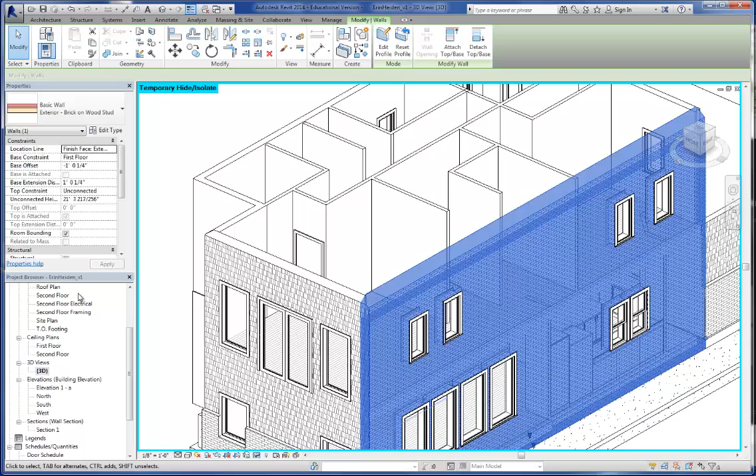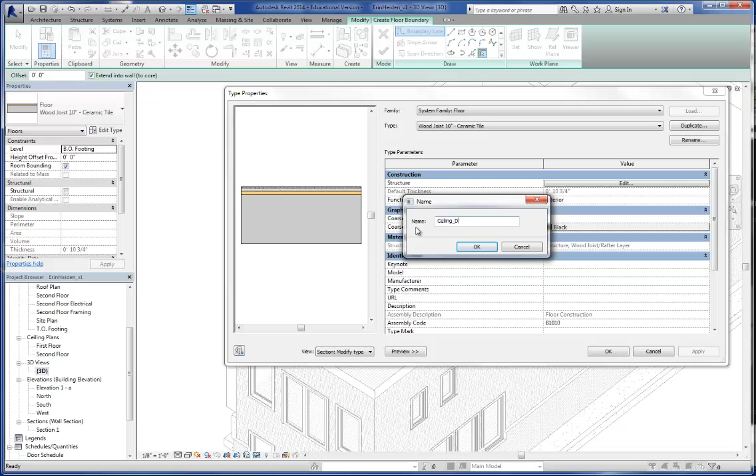There we go. Okay, now what we're going to want to do is create a new floor plate. Now that sounds kind of counterintuitive, but you'll see where we're going with this pretty quickly here. So we go to floor, and I'm just going to pick one of these guys, this 10-inch joist. I'm assuming somebody's done the structures on this, but then we're going to duplicate, and I'm just going to call this ceiling DH. I'm going to be developing this here, okay?

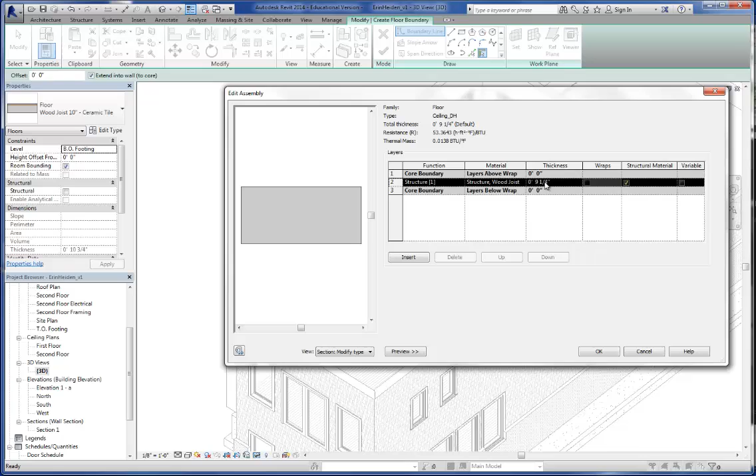So we'll go ahead under structure, and we can go ahead and just delete away these layers that we don't need. Those will be exposed up in the ceiling. We're not going to have plywood sheathing because it's not going to be occupiable — people will be able to hop from joist to joist if they're up there. So we have only the joist itself, and you can see here the actual dimensions relative to the nominal, right? So we'll go ahead and hit OK. And hit OK, so we have our 10-inch, so to speak, joist.

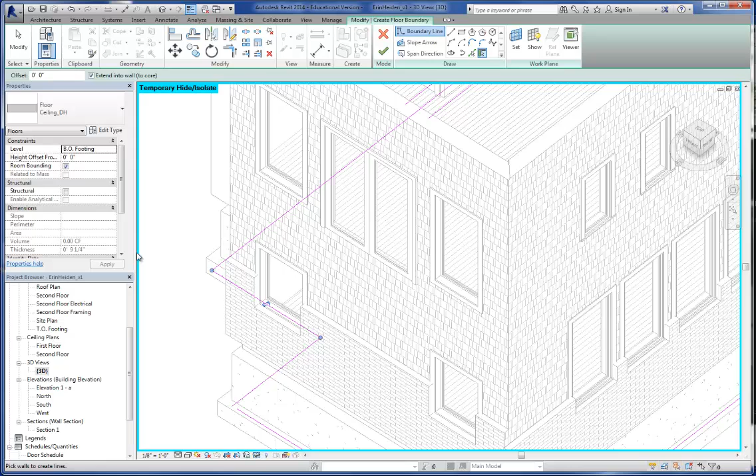Now we are in floor plan sketch mode, so we can select by wall, going in a clockwise direction, and I'll note that this didn't close because we have two different wall types. So I'll go ahead and just align that, and align this. I'm going to go ahead and set a different span direction here, because this is going to be the direction that we would actually have the joist moving.

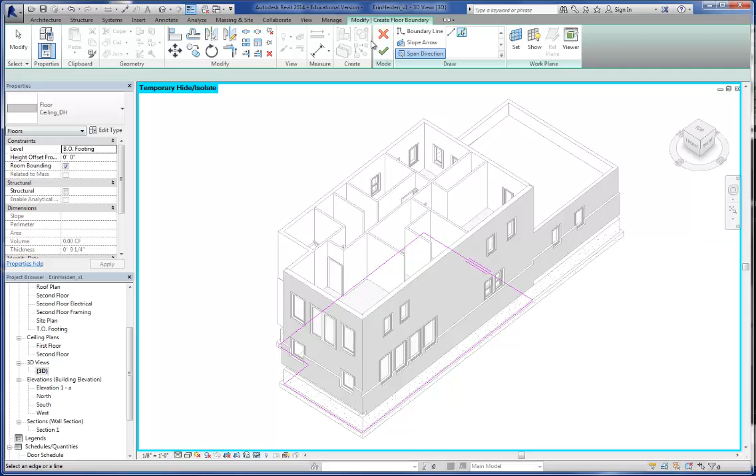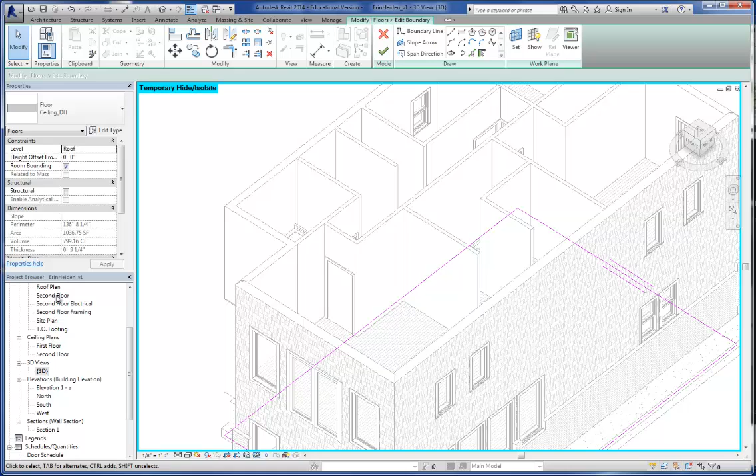Okay, so hit OK, and it created that, and we didn't put it on the right floor, so we're going to go put it in the roof floor. Okay, and you can see that that's now been created here. Alright, so if we go to edit the boundary now, let's go into our second floor plan, and let's just get these things aligned here.

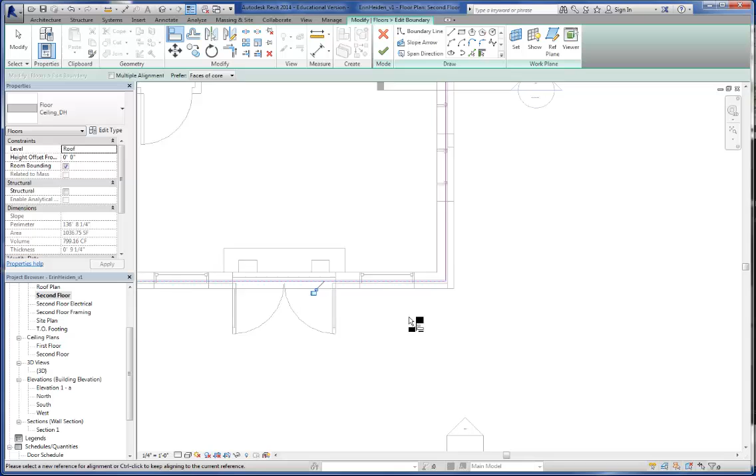So we're going to be faces of the core, roll over, get that, and I'm just going to do these two faces because that's continuing along with what I've done already. Okay, so hit OK. It's going to ask us to join this stuff, and we can hit yes.

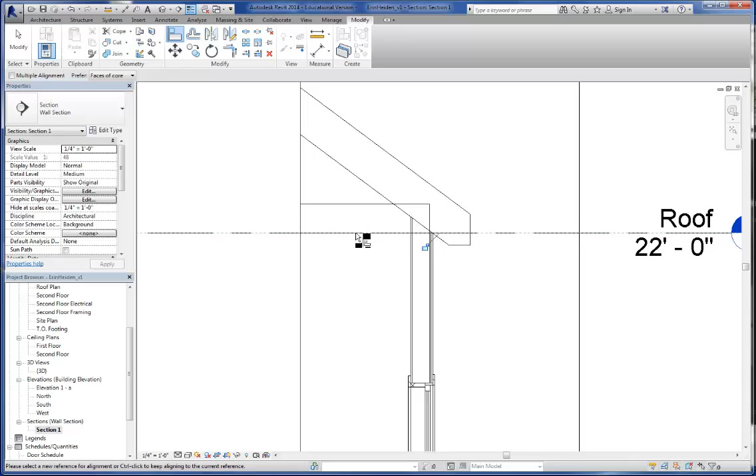In real life, what you do is you'd have some kind of structure coming up in here, and I'm not going to get into this to go crazy, but we'll just go through, and this is essentially how you guys can start to set this up.

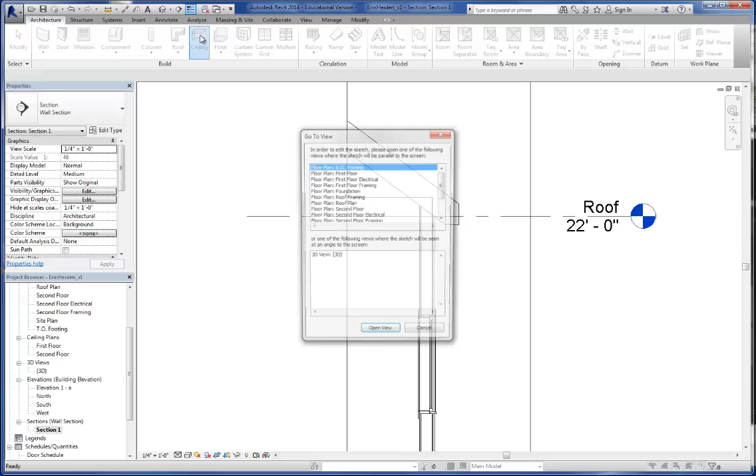Okay, so if we go through there, and now we're going to go into the architecture in the ceiling here. We're going to place the ceiling, and I'm just going to go into 3D view to do this. So now we have that on there. We can literally attach to the plan, attaching to the bottom of that.

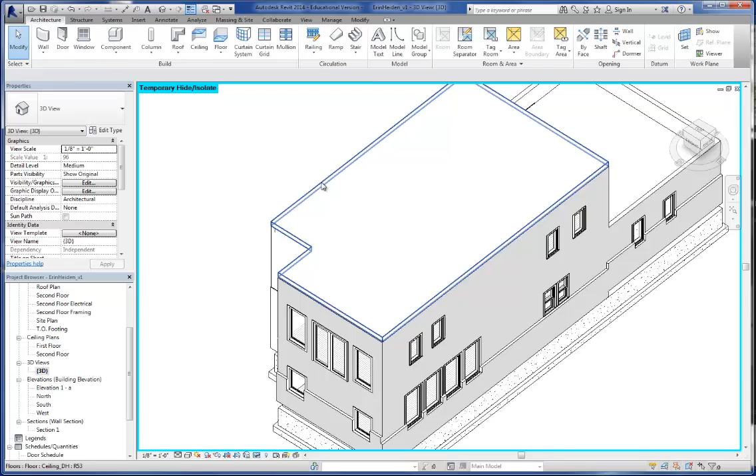So we have ceiling, and we'll set this up on the second floor. You can see that roll over there, and then it's going to automatically try and tag over to that. So I'm going to go ahead and hide these elements away so that I can see where I have and have not placed ceilings in here.

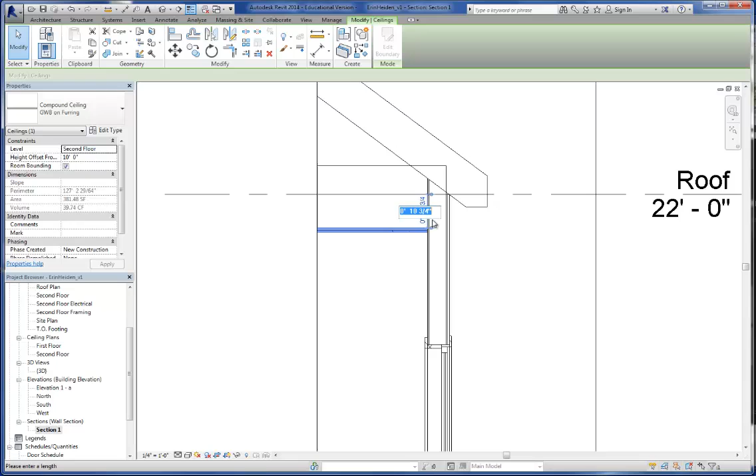So right now we have a 10-foot offset, so let's make sure our offset's right, because we won't really be able to easily see here. And it looks like we'll have some distance between there and there, so let's set that to 0.

Alright, and that gives us an offset of 10 foot, 10 3/4, so we'll copy that. Alright, now if we go back into our 3D view, you can see that that's sitting there, everything's alright, and that will actually be mounted into the studs there.

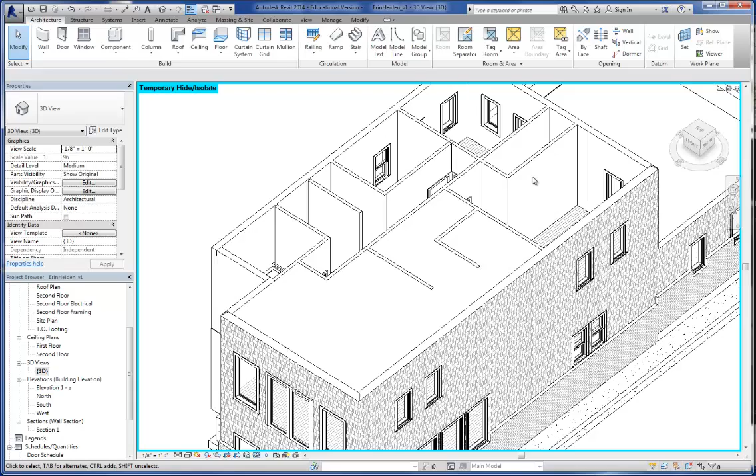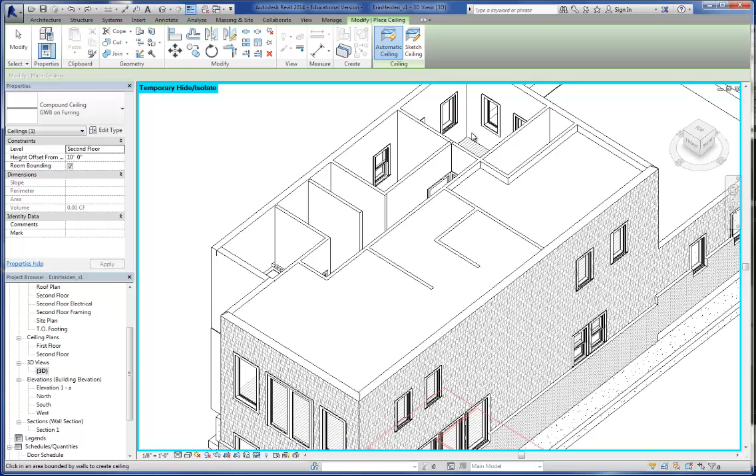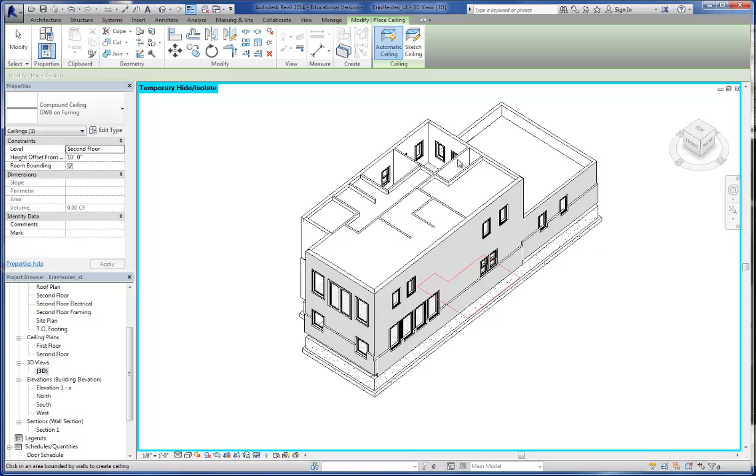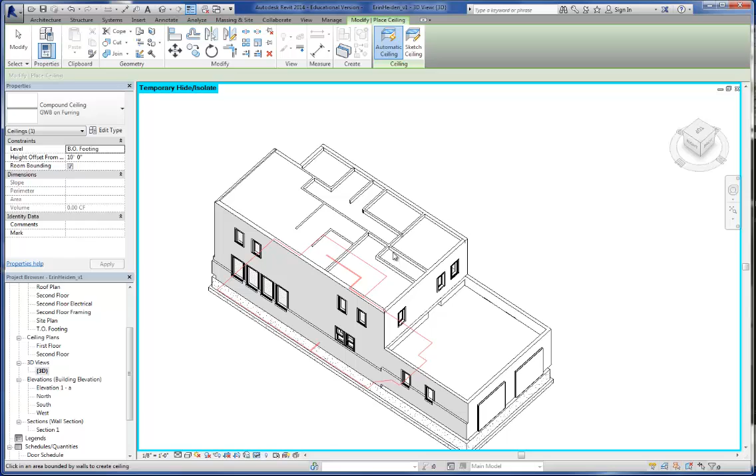And so now we can place more other ceilings. And so we'll go ahead and do this. Alright, so now we're almost there, one more. Okay, I don't think I created any extras, but we'll see.

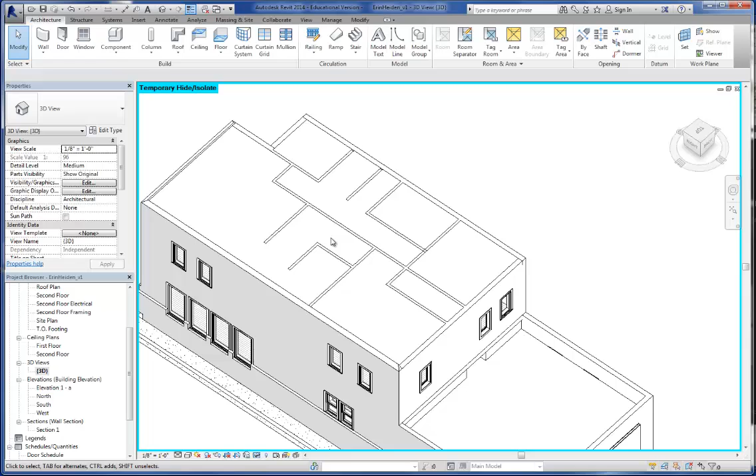So if we then go and select these guys, because they're all the same type, we can come in here and just paste in that new value. Alright, now all those guys will actually come up and meet the floor, and we'll have a ceiling with this hung on gypboard in our section here. So we'll look at this, and you can see now this is all set.

Alright, and so that's going to be the placing of the ceilings in this, and you can see our section continues to develop here. And at this point, we're just going to go ahead and take a quick building section through here. So I'll just show you guys how to do that.

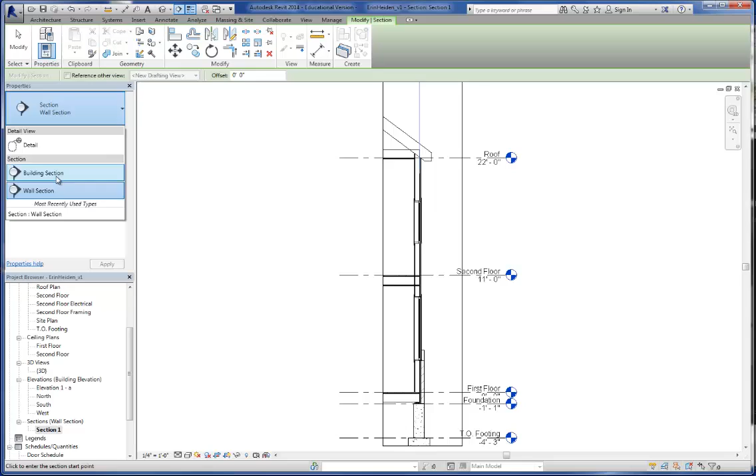Building section. Okay, cut through building, and we'll go into our floor plan here. We can just, okay, so we'll just take this guy and cut him like that. We'll go ahead and just look into the kitchen here.

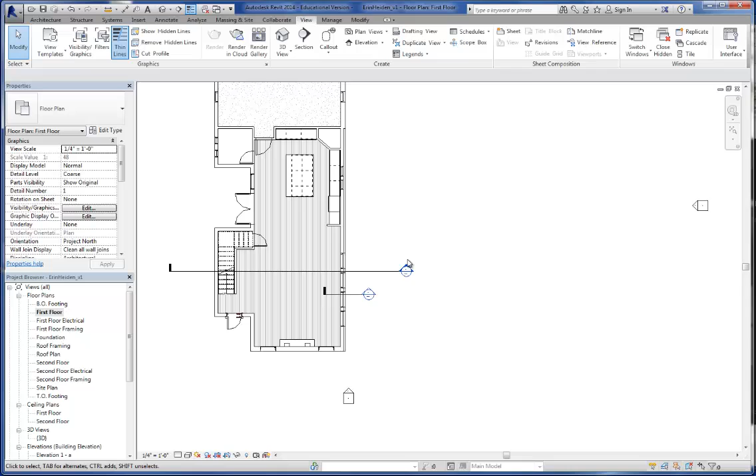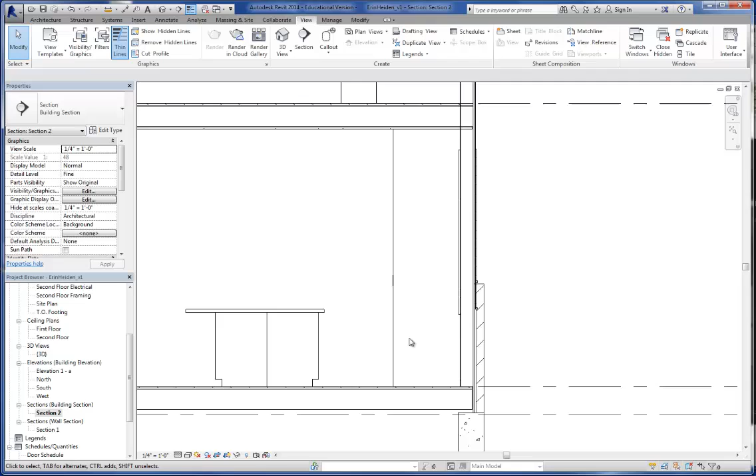Building section, section 2. Start to see how this thing's starting to form up. And we'll go ahead and set this to fine. You can see I probably need to place this. Looks like this has now become unjoined.

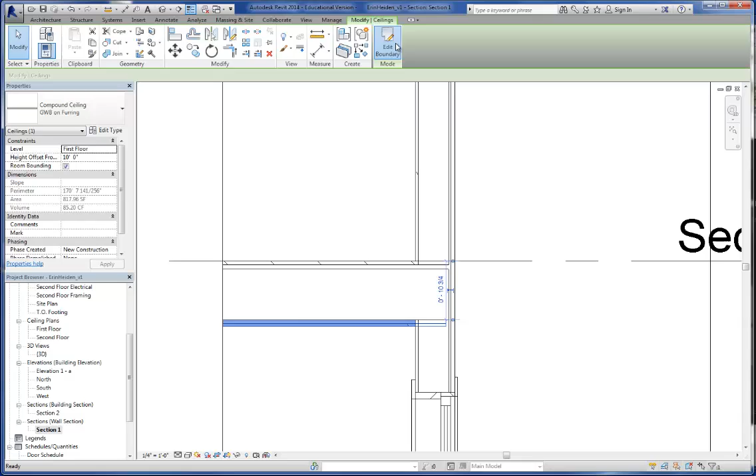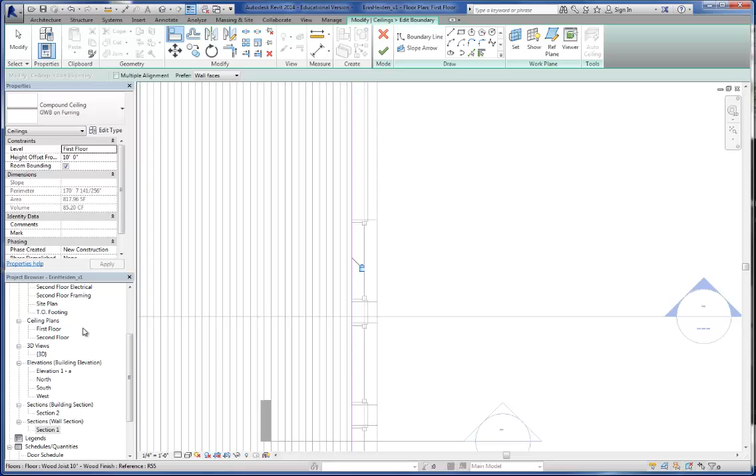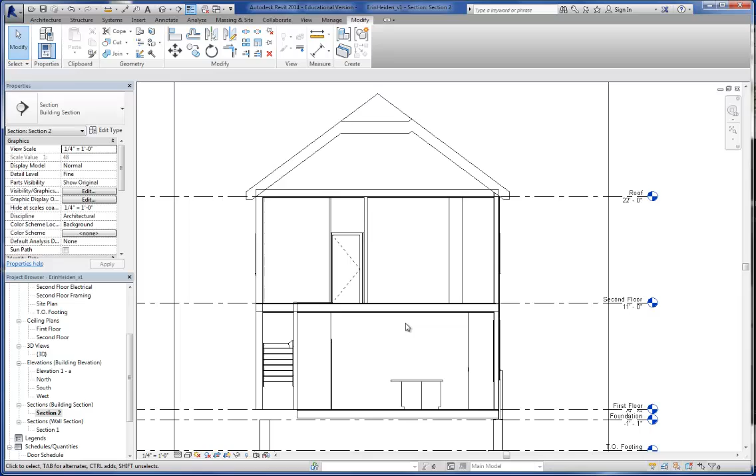Alright, you can see how this is all working. It's coming together pretty nicely. Okay, so and that's going to go ahead and conclude this demo.